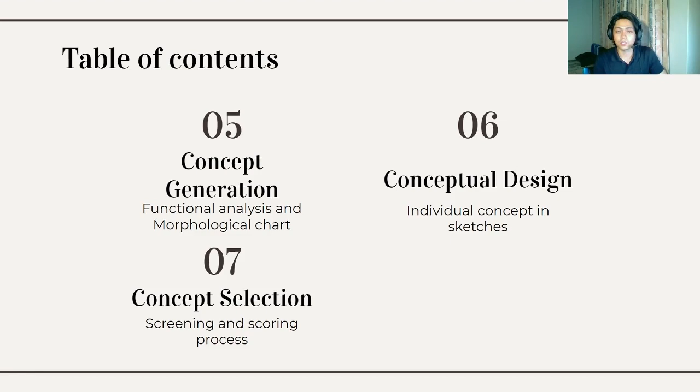The content of this presentation are introduction, design requirement, project management, background research, concept generation, conceptual design, and concept selection.

As for the introduction, I will explain about project summary, objective, and scope. For project summary, beach littering is one of the main problems faced in our country, and it has become a major global concern. Beach littering can cause many problems, such as destruction of a tourist attraction, the endangerment of ocean species, and could even pollute neighboring countries.

One of the main problems of cleaning beaches is human labor. Humans can't keep cleaning beaches 24/7. There is a limit of an area one person can clean up. In addition, acquiring many workers to clean up beaches is expensive and hard to manage.

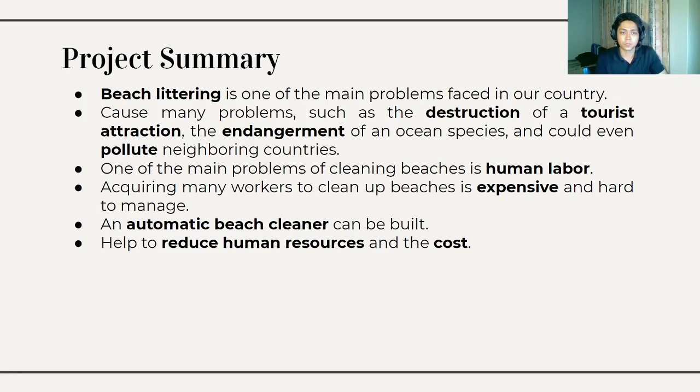To combat this issue, an automatic beach cleaner can be built in order to help humans with solving the littering issue on the beach. This machine can help to reduce human resources and the costs associated with cleaning up the beach. The objective of this project are to clearly identify and describe the problems and scopes of the beach cleaning machine project.

To collect, analyze, and present data in meaningful information using beach cleaning machine project-related tools, to select, plan, and carry out an appropriate problem-solving methodology. The team have to solve the problem and build the beach cleaning machine in an efficient and ethical manner, and also effectively present the results in written and oral form, as well as complete virtual prototyping.

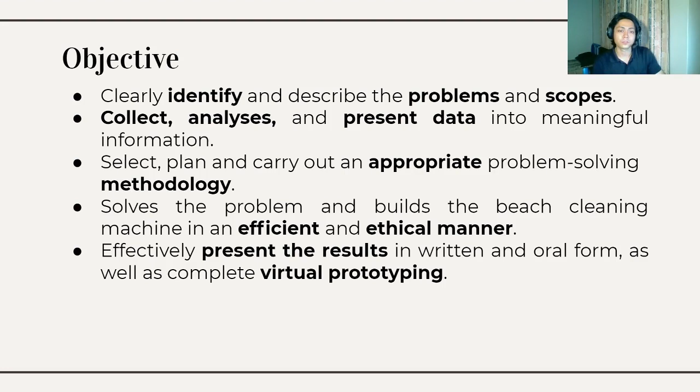The scope of this project: the beach cleaning machine only works at sand beaches on the surf zone only, usually between 5 to 10 meter in depth. The size of the litter cannot exceed the size of machine's collector. The machines can only collect floating litter on the ocean surface. The system should be able to collect the litter autonomously. The system also should be able to move on the water surface, withstand sand, small waves, and seawater.

The machine should be able to work in a certain range only. The model should not have complicated shapes, so it is easier for the fabrication process. The collection system should be based on a suction system. The machine design should be easy to maintain, and the system should be able to operate 24/7. And last, the machine should be environmentally friendly.

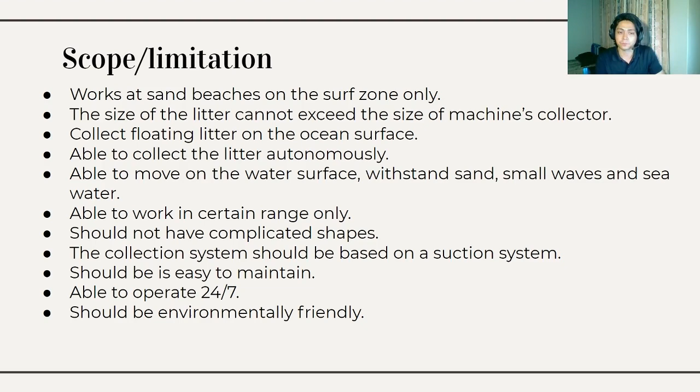Second, it should be able to collect the trash on the surface of the ocean, able to collect and suck in both trash and oil to the container, which is the storage chamber, able to withstand the watery condition and hot weather as we design for the ocean, able to operate at least 50 cycles without requiring maintenance, easy to operate with minimal procedures, can be easily maintained, can be operated up to 10 meter in radius.

This specific distance is due to us working on a large area, which is the ocean. Materials used are resistant to corrosion, lightweight and strong, with a lifespan of 4 years. The storage and sponge must be cleaned once per 3 days, because the storage is specific for the trash and the sponge is specific for the oil on the ocean, able to collect and suck in both trash and oil.

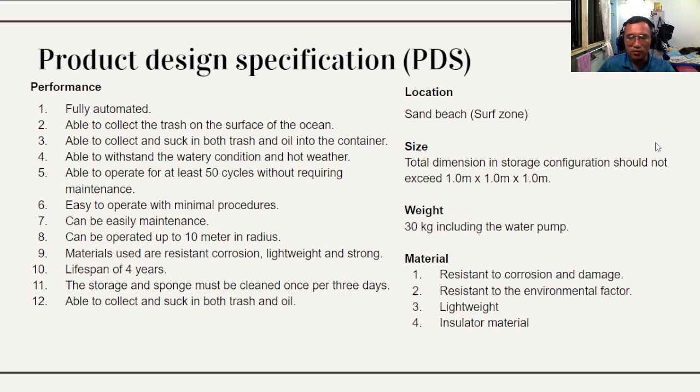For the location, we decide to do it at the sand beach, which is the zone as stated before, because the wave is not too strong there, and the device is not easily drifted by the wave.

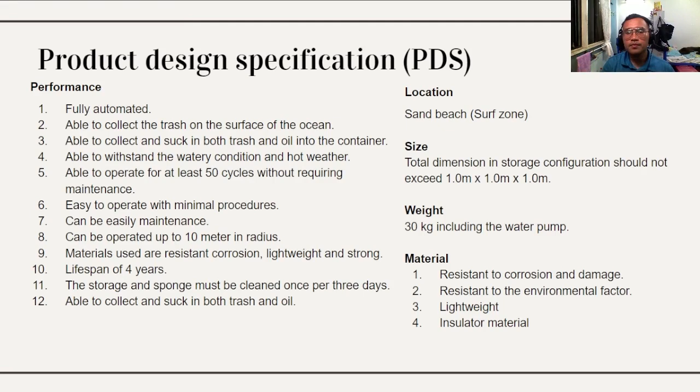For the size, the total dimension should not exceed 1 by 1 meter, which is considered too large for a floating device. Weight is not more than 30 kilogram, including the water pump. This is because if it is too heavy, it will consume much more energy.

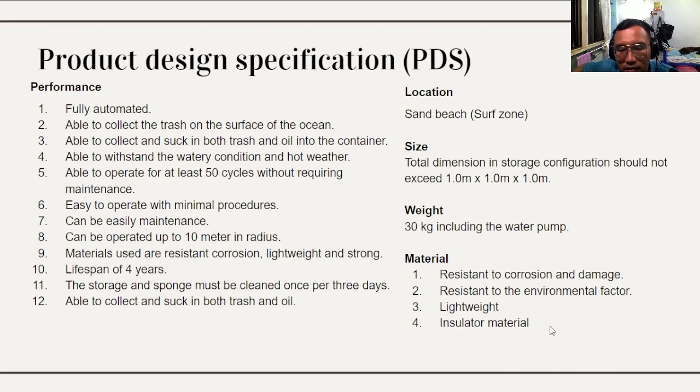Material resistant to corrosion and damage, resistant to environmental factors such as the wave itself, lightweight, and insulated material. The next one is the cost. The maximum budget for this product is 500.

The demand on the machine would be high due to its flexibility and functionality. Environment-wise, it must not harm the ocean ecosystem, and no aquatic life will be trapped in the storage. As we design, we are focusing on the ocean surface only, able to withstand the wave on the ocean floor. The noise level must be below 90 decibels for 8 hours a day.

Quantity: 1 unit as proof of concept. Maintenance: easy to service and maintain due to the availability of spare parts in Malaysia, replacing the lubricant used for the motor, producing a lifespan of 10 to 20 years.

Suction mechanism, which is the pump or the motor, lifts the ocean water and overcomes the frictional force of the pipe. The second one is overcoming the pressure difference between the pump and the outlet of the system with zero flow to lift up the ocean water. As we design this...

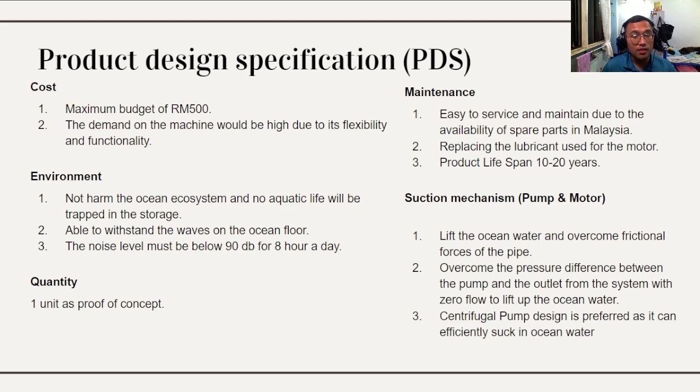To collect all the trash by using the water flow, we need to use suction to bring the trash into the storage chamber. We are using a centrifugal pump design as it can efficiently suck in ocean water. This is because the centrifugal pump is much more efficient compared to other pumps for water suction.

The device power source: first is power consumption, which is 1 horsepower, equivalent to 750 watts. Power supply is about 180 volts to 220 volts and 50 hertz.

Filtration collection: cellulose filter media, as it is less restrictive to oil flow and capable of absorbing water from oil. The second is a large surface area to hold as much oil as possible. The mesh filter should have a 2 to 3 millimeter gap. This is for the absorbent part.

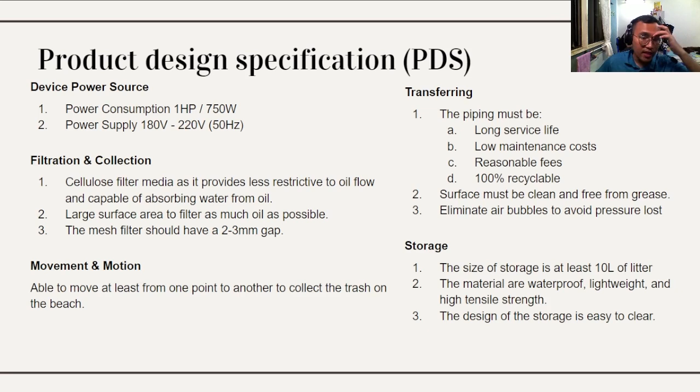The movement and motion should be able to move at least from one point to another to collect the trash on the beach. For the transferring, the piping must have a long service life, low maintenance cost, reasonable fees, and be 100% recyclable, made from plastic or any polymer.

The second point is the surface must be clean and free from grease. This is the main purpose because we need to suck the oil, and if there is grease, we are just increasing the oil on the surface of the ocean.

Eliminate bubbles to avoid pressure loss. This is one of the most important features because we need the pressure to make it function efficiently.

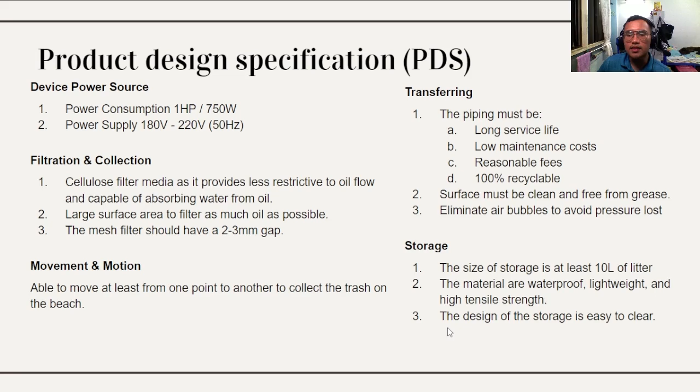Storage: the size of the storage should be at least 10 liters of litter. The materials are waterproof, lightweight, and high tensile strength. The design of the storage should be easy to clean.

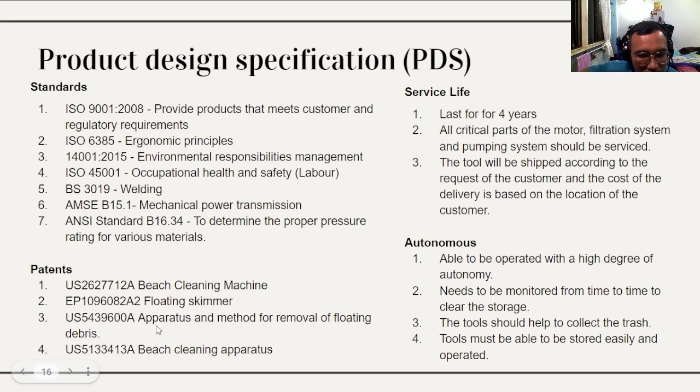For the patent, there are several patents we are referring to: beach cleaning machine, floating skimmer, apparatus and method of removing floating debris, and beach cleaning apparatus.

Service life: the device or machine should last at least 4 years. All critical parts of the motor, filtration system, and pumping system should be serviced. The tool will be shipped according to the customer's request, and the cost of delivery is based on the location of the customer. This is for the service life.

Lastly, the main point of this project is autonomy: able to operate with a high degree of autonomy, needing to be monitored from time to time only to clear the storage, with operation that is fully autonomous.

The tools should help to collect trash. Tools should be able to be stored easily and operated.

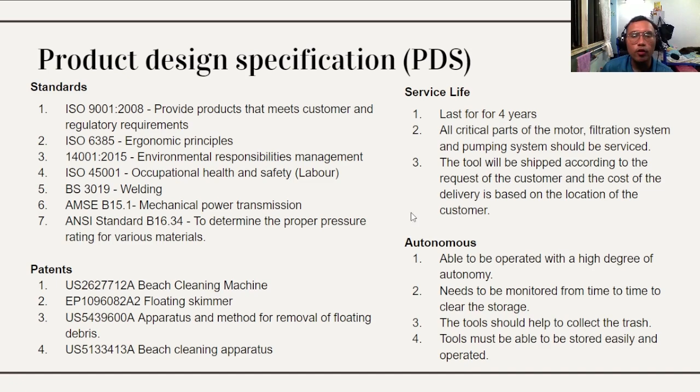For safety, the tool must be safe to use. Sharp edges should only be present on the movement mechanism. Pinch point use must be minimized, and those present must have a caution warning.

The moving part of the movement mechanism must be enclosed. There should be a warning near the collector mechanism.

Inclusion of a user manual is a must. People should monitor the machine from time to time. For aesthetics, it should show a sense of reliability and be safe to use.

Preferably something bright in color so that it doesn't absorb heat from the sun. If it's too dark, it's harder to detect on the ocean when the device drifts. A bright color also allows the tool to be more quickly noticed.

This is for the third point. The manufacturing process requires the use of heavy machinery designed with SolidWorks, and 3D printing for the model, tested in a watery environment. The suction power of the machine should be high enough.

Shelf life storage: shelf life is 10 to 15 years. For the time scale, it is 11 weeks for the final design, final prototyping, and other documentation, not including fabrication.

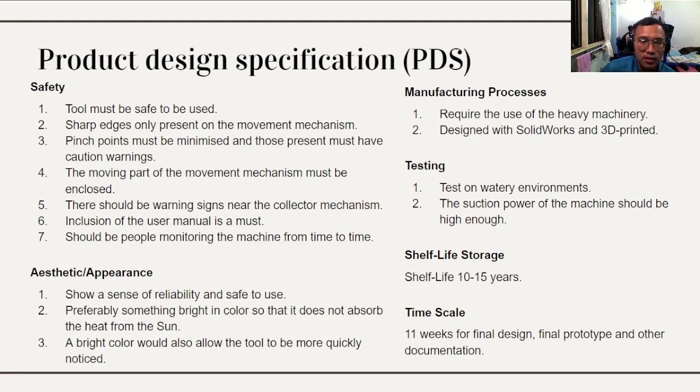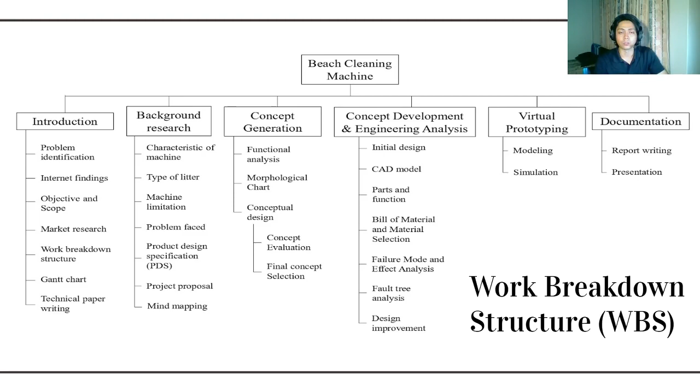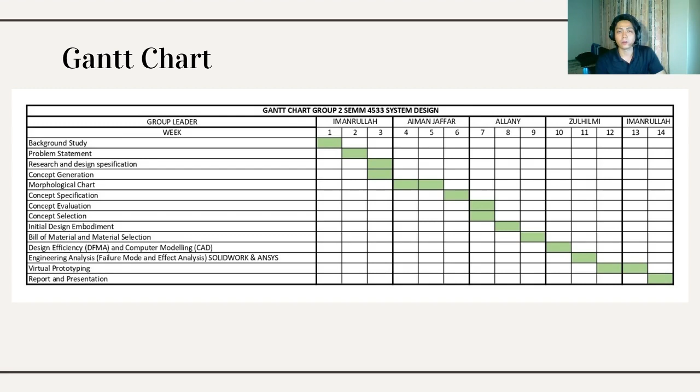For the last 2 weeks, we plan to finish the prototyping and provide a report as well as presentation of the overall project. Hi, Assalamualaikum.

My name is Muhammad Imanrullah bin Hafizan and I will present about the background research as well as the concept generation. To start off, this is our mind map.

So firstly we will look at the issues. The first is environmental issues, strictly about sea life. When we pollute the ocean or the beach, sea life will eat the trash and continue to starve or suffocate, and it will also affect aquatic life. This is all caused by the presence of microplastic and trash in the ocean.

The second issue is also the productivity of man. When there is a lot of trash in the ocean, there will be a high manpower cost, since man is not equipped to clean the ocean and there are limited working hours. So productivity will be slower, and manpower can't do the work during harsh weather, since harsh weather is hazardous for them.

Health issues arise when there is trash in the ocean or on the beach, as the water will be polluted and it will cause diseases.

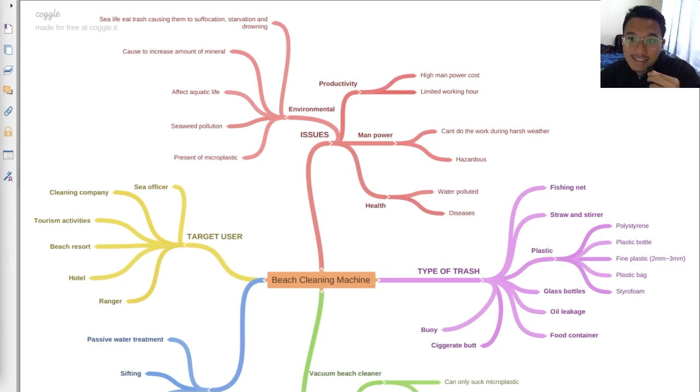So what is the type of trash that we want to clean? For example, we will clean fishing nets, straws and stirrers, plastics such as plastic bottles, plastic bags and so on, glass bottles, oil leakage, food containers, buoys, and cigarette butts.

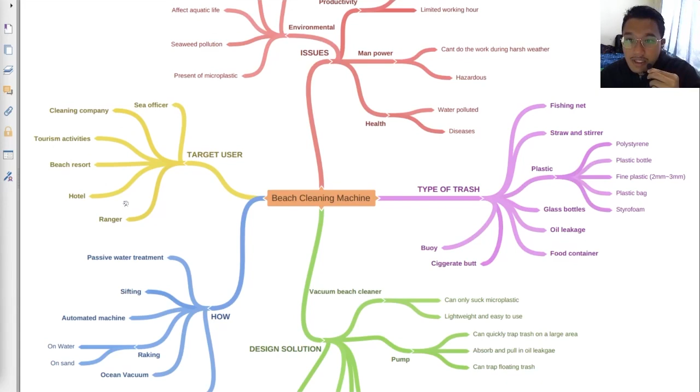So what is our target user for our beach cleaning machine? It is for sea officers, cleaning companies, tourism activities, beach resorts, hotels, and also rangers. So how do we want to clean the ocean? The way we want to clean the ocean is by passive water treatment or sifting, or an automatic machine, which is our primary focus here.

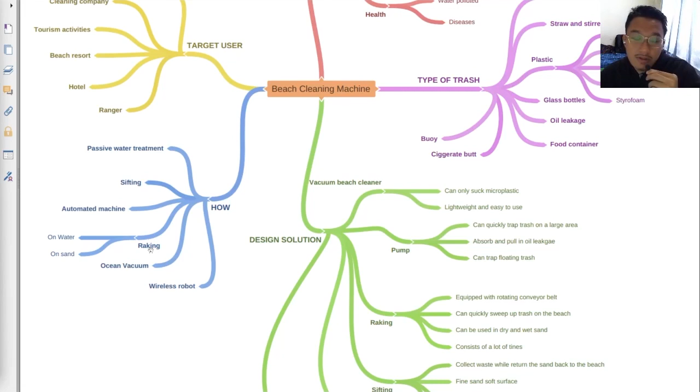Also raking, on the water or on the sand, using a vacuum on the ocean or using a wireless robot. So lastly, we come up with 6 design solutions for the beach cleaning machine.

Firstly is the vacuum beach cleaner. For the vacuum beach cleaner, we can only suck the floating microplastics, and it will be lightweight and easy to use.

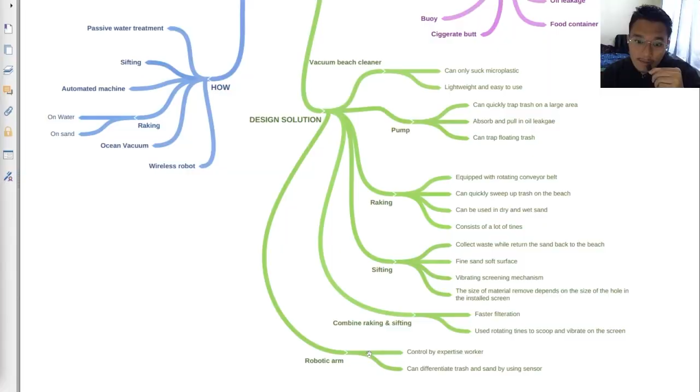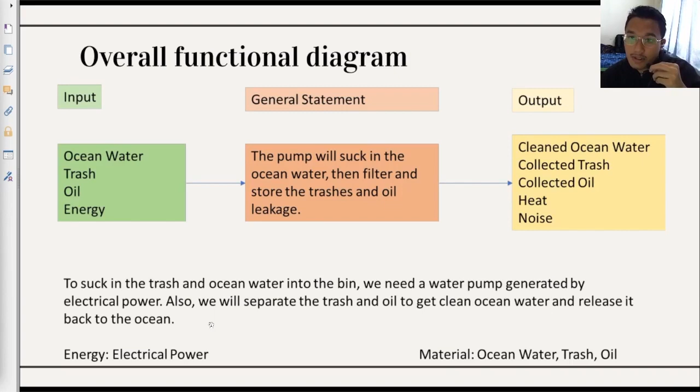We need a water pump generated by electric power, and we will separate the trash and oil to get clean ocean water and release it back to the ocean.

So this is the more detailed explanation. There are 4 inputs here and 5 outputs.

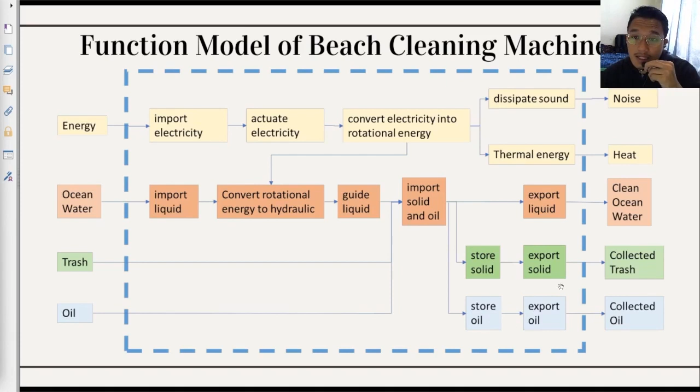So this exports the liquid and will export the clean ocean water out of the system, and we also store both the solid and oil. Solid means the trash, and then we will collect the trash and oil when it comes to maintenance.

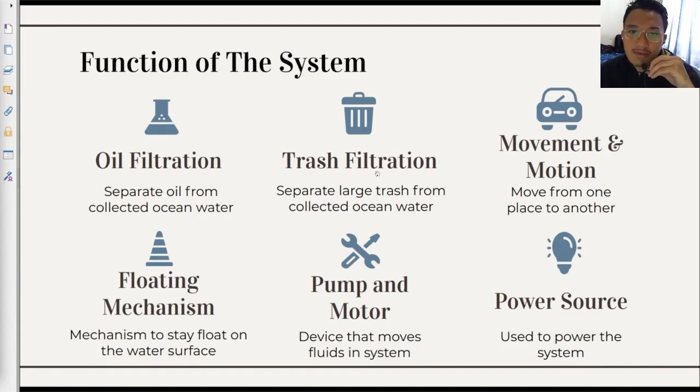Next, I will explain the function of the system. There are 9 total functions of the system: oil filtration, trash filtration, movement and motion, floating mechanism, pump and motor, power source, suction compartment, transferring, and position fixing and sinking mechanism.

Firstly, I will explain the oil filtration. There are two sub-functions of the oil filtration. Firstly is the oil storage, where we will store the oil in the storage.

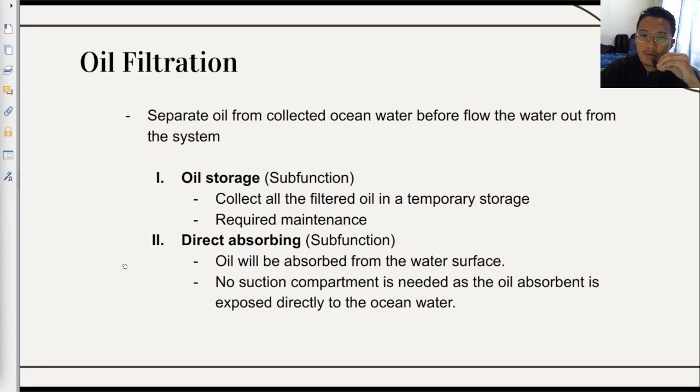So the direct absorbing in the second sub-function, oil will be absorbed from the water surface, where the oil will be exposed directly to the ocean water.

Next is the trash filtration. There are also two sub-functions of the trash filtration.

First is the collector, which will collect all the trash from the water surface mechanically and then transfer to the storage. In the storage, the collection of trash is in a storage where the storage is detachable.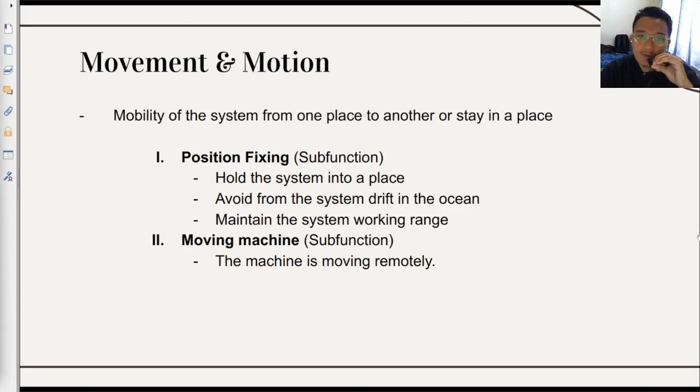Then the next sub-function is making the machine move. So the machine will be moved remotely to get more trash and oil from the water.

Next is the floating mechanism. This is the buoyancy mechanism where it will ensure the mechanism can stay afloat above the water surface to collect the floating trash and oil. It will also provide high stability on the ocean to reduce capsizing.

Next is the pump and motor. This is used to create pressure difference inside the system to provide water suction to suck in the trash and the oil into the system.

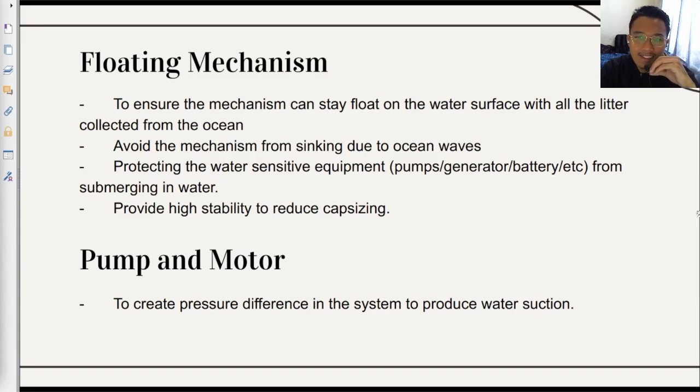Next is the power source, the main source that we will use to power the system, and the suction compartment, which is the entrance of the water flow from suction and will act as the collection compartment.

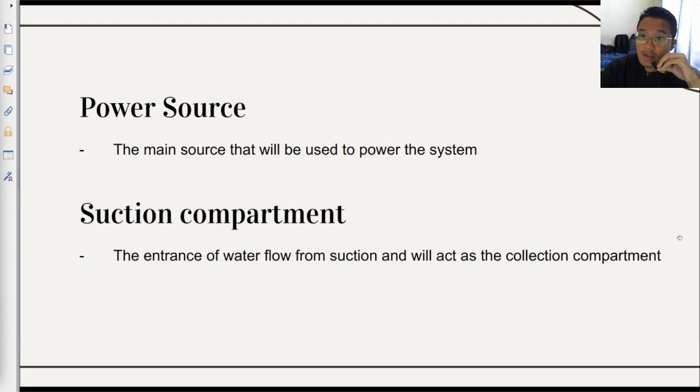For the transferring, it is used to connect between the suction compartment and the water pump and to flow the water into the system.

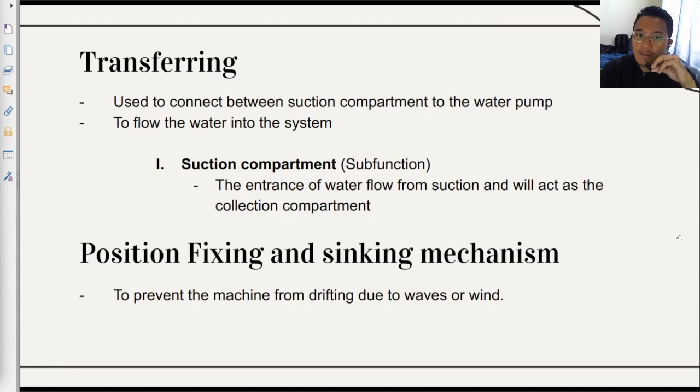And lastly is the position fixing and sinking mechanism, which will prevent the mechanism from drifting due to the wave or the wind. Next is the morphological chart for the system.

So firstly is the oil filtration. The first one we got a two-way filter. Next is a three-way filter where they got two inputs and one output. Next is the spinning filter which will spin around. Next is a sponge where it will absorb the oil, and also oil absorbent filter mat. So fine mesh screen filter, centrifugal filter, oil absorbent cylinder, and also the last option is no oil filtration at all.

And the second mechanism is the trash filtration. First is the rounded bucket and a net, and a square bucket, a cylinder bucket, a net with ring, an open box container, or we just don't include the trash filtration at all. A sub-function of the trash filtration is the trash collector, which is the roller, a raking, sifting, or lastly we just don't include it. The third mechanism is the movement and motion.

Firstly, there is a cable line with motor where the cable line will be fixed in two directions. System will be dragged from each end to the other end. Next is the zip line with motor on the machine, which acts the same as the cable line, but the mechanism for the rotating of the movement will be built onto the machine instead of on the cable line. Next is the propeller. Next is the thrust fan, a water pump exhaust so that the exhaust from the water will move the machine.

A water wheel where the water wheel will spin around and create a force to move the machine. And lastly, we just don't include the option.

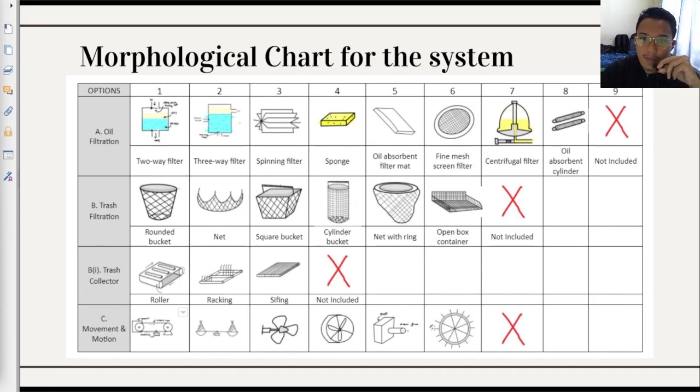Next is a floating mechanism with a floating stick, buoyancy concept, a raft, a buoy, semi-sphere boat, catamaran boat, two wings, and not include a floating mechanism at all.

Next is a pump and motor. We use gasoline water pump or centrifugal water pump, or we just don't include the pump and motor.

For the power source, we use petrol, solar, battery, wind, wave. Lastly, we don't include it.

For the suction compartment, we use a round bucket, a rectangle bucket, a water channel, pipe with hole, split channel, and not included. Next is transferring.

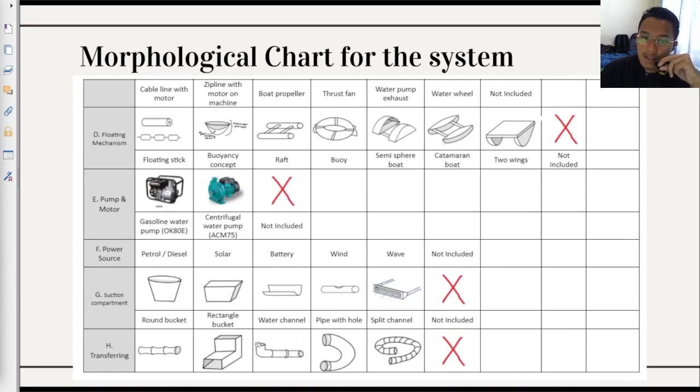We use a ring pipe, a built-in compartment, polymer pipe, hose pipe, flexible pipe, and not included. Lastly is the fixing and sinking mechanism. Firstly, we use anchor, a fixed pole, a buoy, a self-load, or lastly, we don't include it. That's all for me. Thank you.

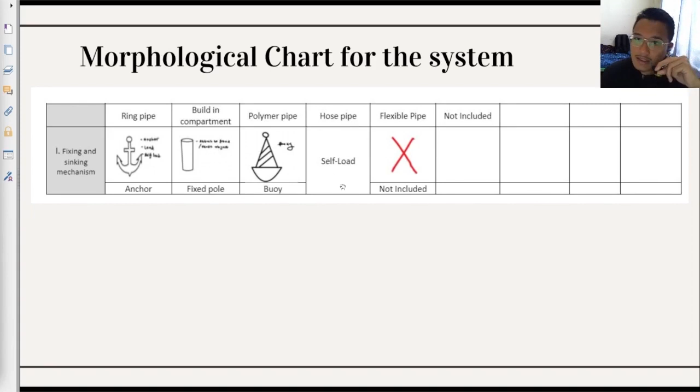My name is Muhammad Aiman bin Jaafar, matric number A18KM0189. Today I will present the conceptual design and conceptual selection from my group 2 for this system design project. Every team member needed to provide 3 conceptual designs, and for my group we have 4 team members, so a total of 12 conceptual designs will be provided, and each conceptual design needs to follow the product design specification (PDS) that has been provided. So let's get started.

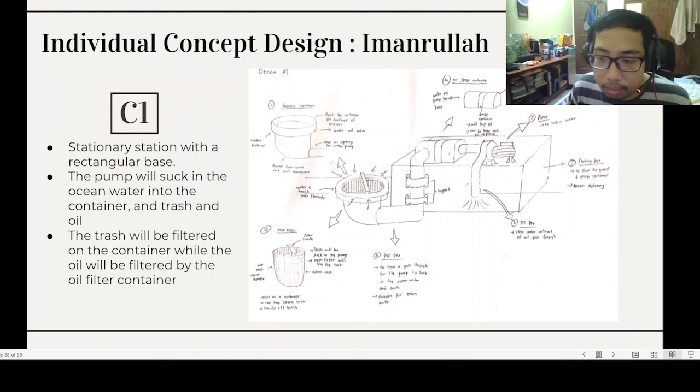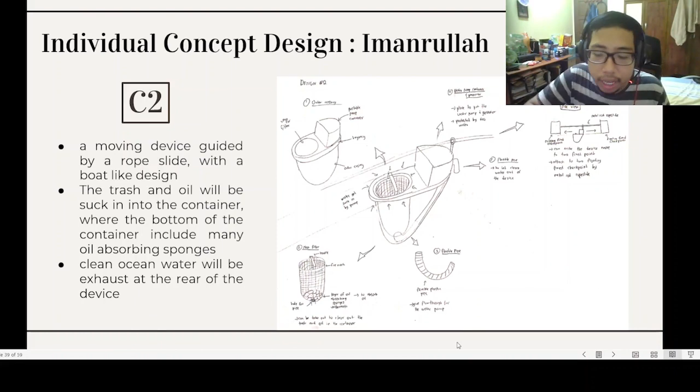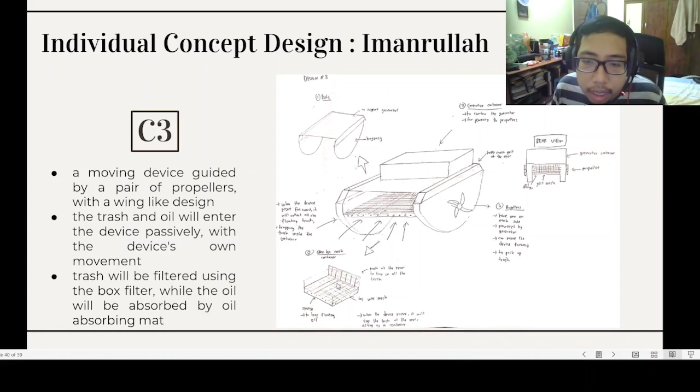So the mechanism of this machine is same as other. When the pump is on, the ocean water will suck into the collection storage and the catch bag, so the trash will trap into the catch bag, and the water will flow into the filtration system and will be filtered.

And this machine is operated using electrical energy, which will power up the propeller to move around and the pump system, and also will be supported by the solar power cell to support the electrical energy. That's all.

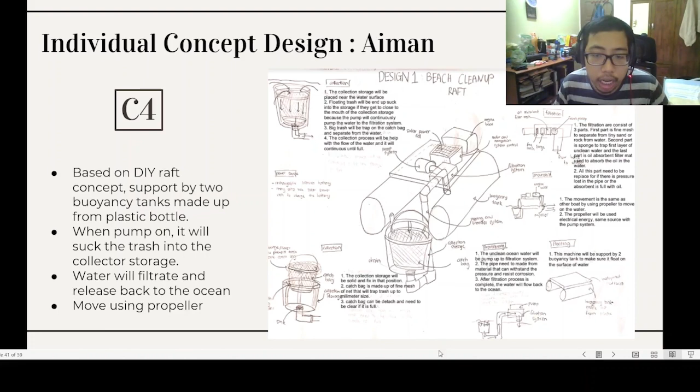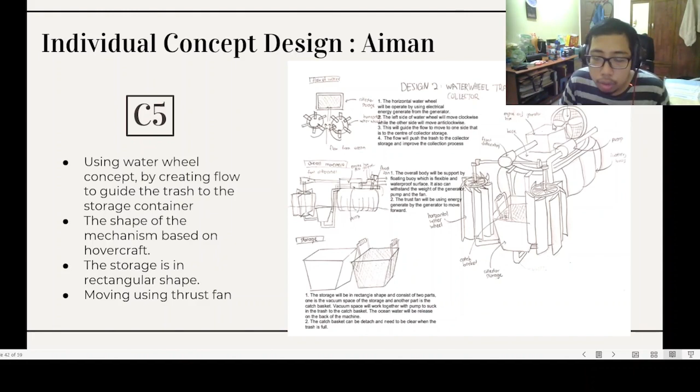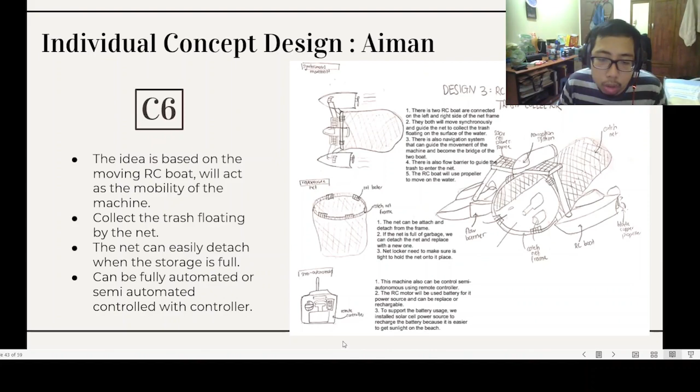So next, we will look into conceptual design 7, prepared by Allany. So all the equipment like the storage, the pump and the filter are inside one main body shaped like a sink.

So the mechanism same as before. When the pump is powered on, the ocean water will move into the mesh and trap by the filter, and the water will flow into the filtration system and exhaust back into the ocean.

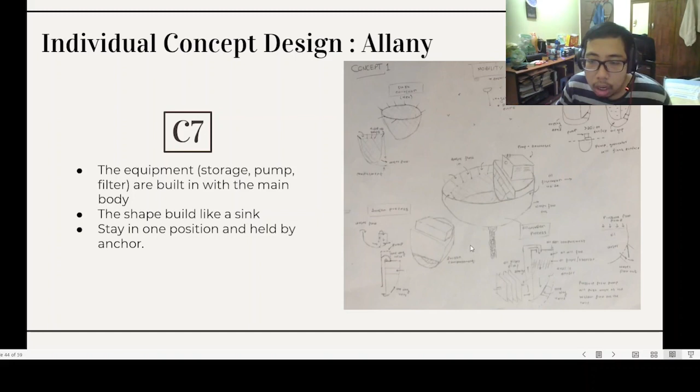And as you can see here, there is a chain below here. This device will stay in one position, held by the anchor, and it just will move around the range of the length of the anchor.

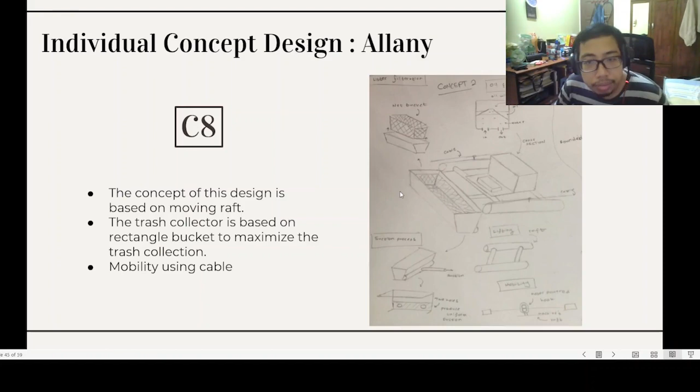So next, for conceptual design 9, this is same as before, the mobility is based on chain and cable, so it will move along the track also, and the bucket suction can be expandable or moving.

As you can see here, it is shaped like a straw, so it can expand and contract depending on how it wants to collect the trash.

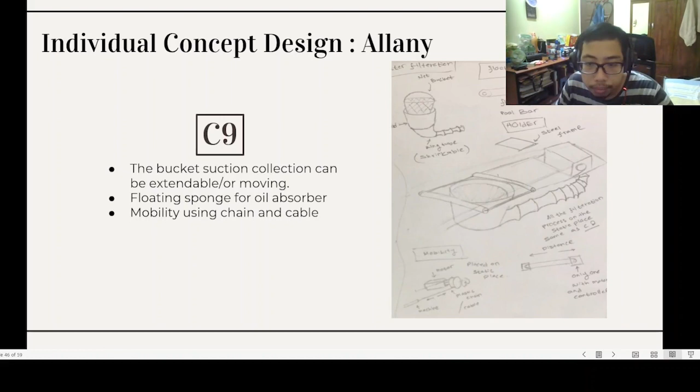So next, we are going to see the individual concept design prepared by Zulhilmi, conceptual design 10. As you can see here, the design is using a catamaran boat system design. Catamaran boats basically have a multi-hull or two hulls to provide high stability to move on the ocean surface.

It also has the oil absorbent tube to directly absorb any oil that is on the surface of the ocean water, and the trash will be transferred and collected by using the conveyor belt here, and it will collect and move into the storage compartment. Also the machine will run by using solar or battery power.

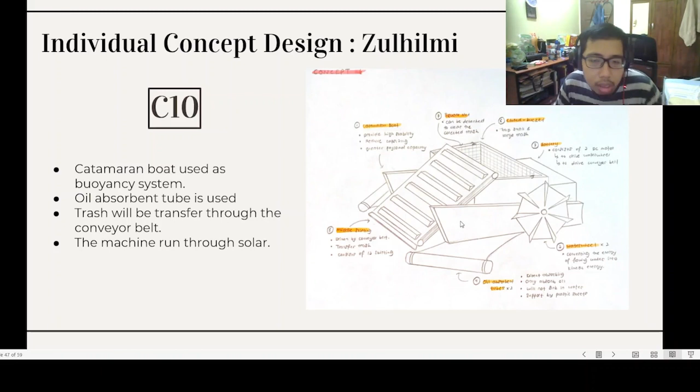Next, we will see conceptual design 11. Here, same as before, it also will use the conveyor belt, the raking system, to transfer and trap the trash into the net.

And it will use two hemisphere shaped boats for the floating mechanism, use the propeller to move around, and the oil absorbent filter mats for direct oil absorbing here. Also here it shows the solar panel to support the battery used for moving the mechanism of the machine.

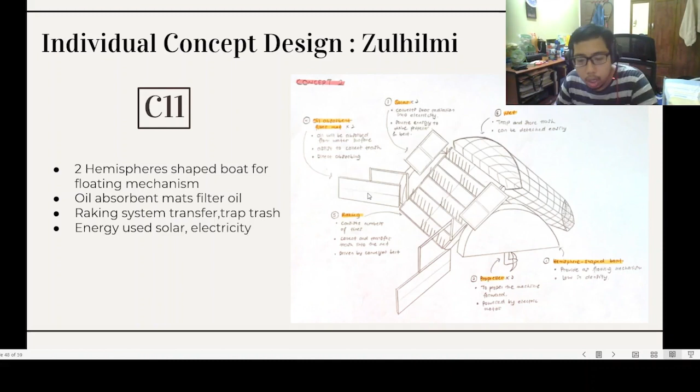So next, for conceptual design 12, as you can see, the design is flat and it is based on a flat-based floating system, so the surface of this mechanism is flat to provide better stability.

And how it works: when the machine moves forward, this rotary collector will rotate clockwise and start collecting any trash or oil on the surface of the sea. As you can see here, it contains fine mesh and screen filter which will trap any oil or trash and move it into the built-in compartment to collect the trash.

And as you can see here, all of these are powered by fuel.

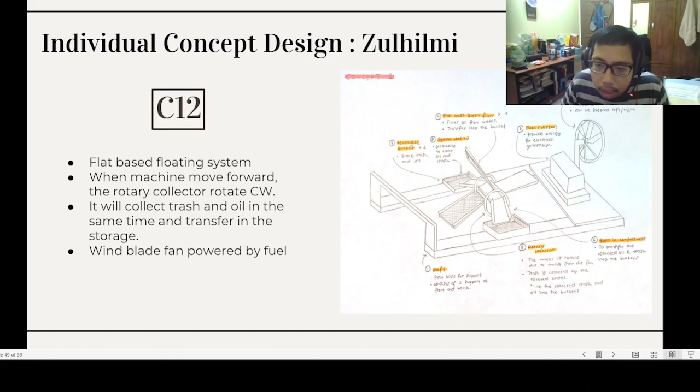So next we are going to see the concept selection. As shown before, there are 12 concepts. So next we are preparing the concept screening matrix, which is the evaluation for the concepts, to compare with the datum of the project.

For the marking scheme, if the concept is better than the datum, +1 will be given to the concept. If the performance of the concept and the datum is the same or equal, 0 mark will be given. And if the concept lags or has a disadvantage compared to the datum, -1 will be given to the concept.

There are 3 stages that we have done. The first stage is the first screening matrix, where from the 12 concepts we only choose 6 concepts and make design improvements. Then in the next stage we do the second screening process, where we choose 3 concepts from the 6 concepts filtered out from the first screening process. After that we proceed to the scoring.

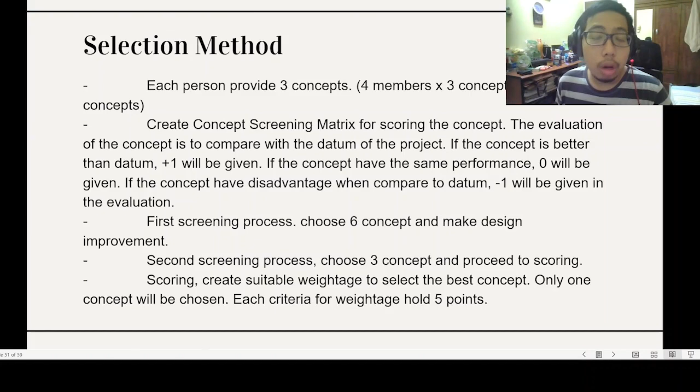For the scoring, we will improvise the concept screening matrix by creating a suitable weightage. This weightage will be more specific in the mark, and each criteria for the weightage will hold 5 points. So these are the selection criteria.

As you can read below, the selection criteria is based on how it can be operated, portability, maintenance, oil filtration, storage oil capacity, manufacturability, trash filtration, user-friendliness, large trash storage capacity, appearance, mobility and movement, overall system, range of operated machine, endurance of machine, stability on the sea, environmental impact, position fixing and sinking mechanism, autonomy in trash collection, trash and oil collection efficiency, and manufacture cost.

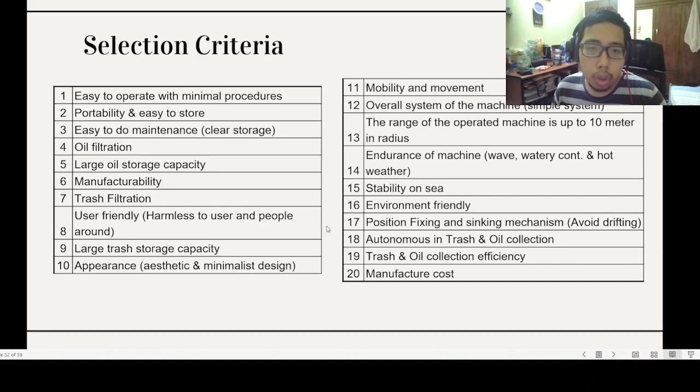Actually, the selection criteria is also based on the PDS, and we also made some improvements to choose which is the best from the concepts.

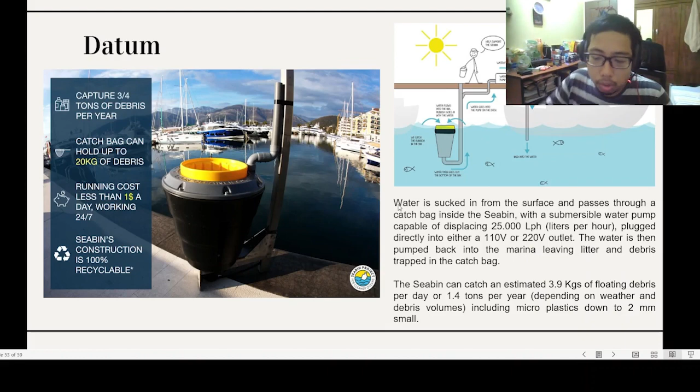So next, this is the result of our first screening process, comparing to the Seabin, our datum. As you can see here, the designs C2, C3, C4, C6, C7 and C10 are chosen from the first screening process.

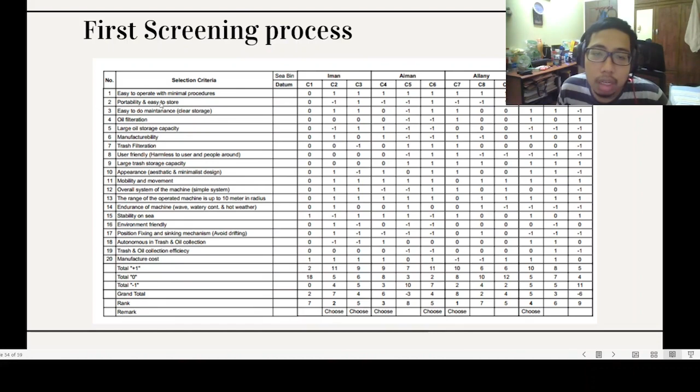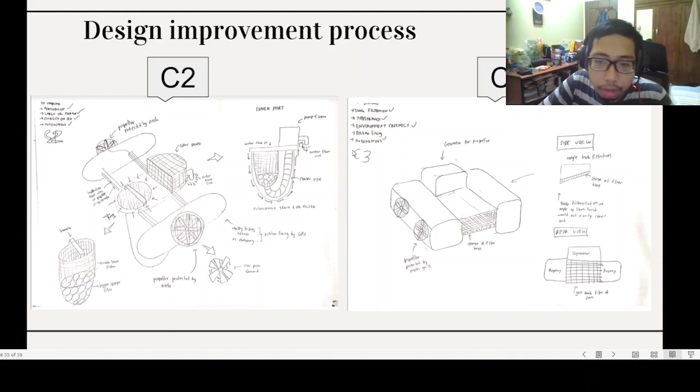After the first screening process, as I said, we need to make some design improvements to check and improve what we were lacking from the previous conceptual design. So this is C2, C3 after the design improvement, C4, C6 after adding some design improvement, and C7 and C10.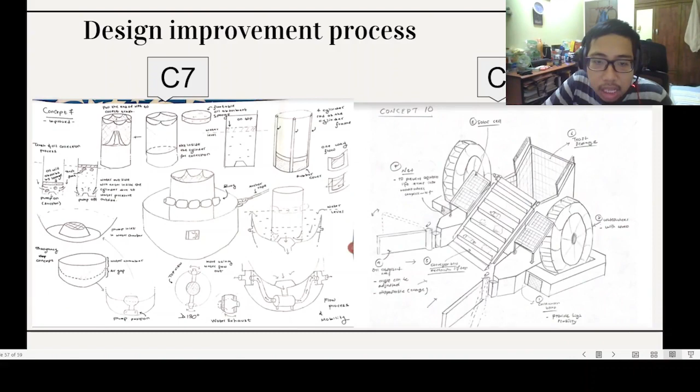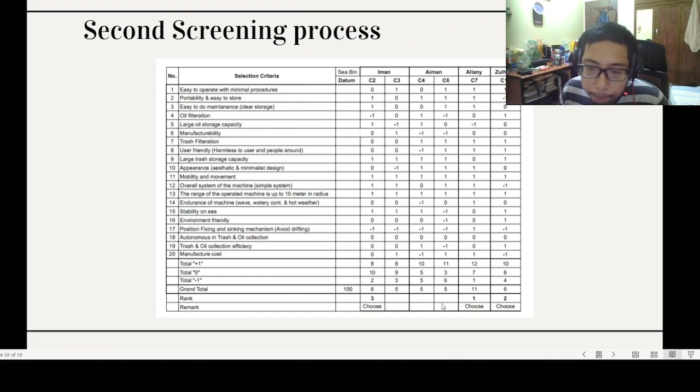But after making some analysis based on the conceptual design, we gathered information that there are 4 criteria that need improvement for C7, such as trash filtration, large trash storage capacity, mobility and movement, and trash and oil collection efficiency. For these 4 criteria, the concept doesn't get the highest mark, so there are some improvements that can be made before proceeding to the next process. That's all from me.